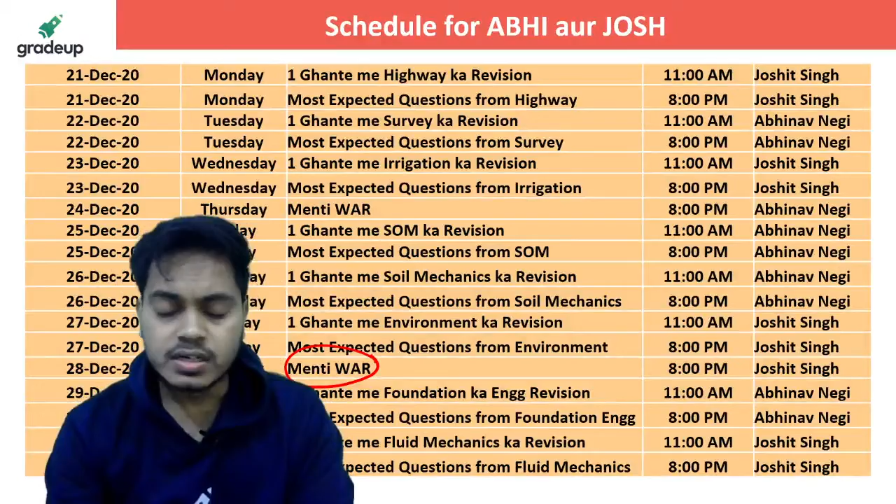If you are not aware of this Menti WAR, let me tell you that there you'll be in one team, there will be only 2 teams. One will be Abhinav sir's team and second will be my team. Commandos versus ninjas will be there.

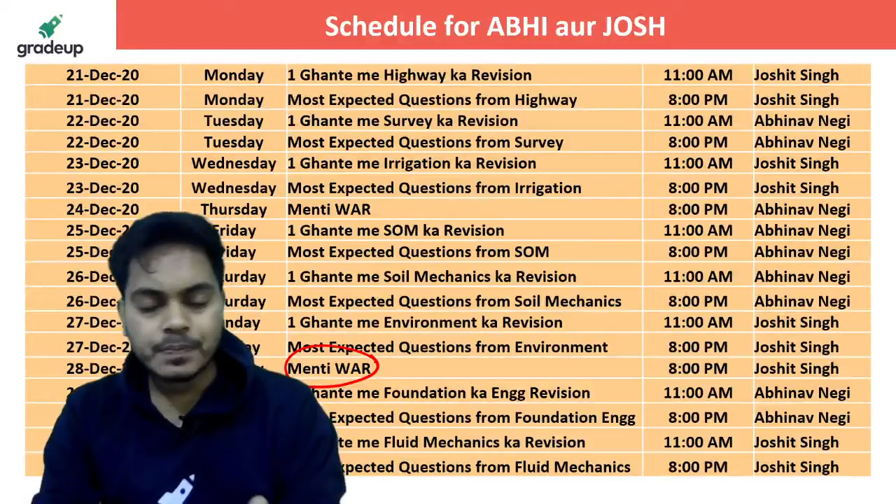So basically there you have to solve the questions from environmental engineering, fluid mechanics, soil mechanics and hydrology. These 4 subjects you have to prepare, and the questions will be from these 4 subjects only in this Menti WAR.

Hi, good evening Simran, hi Varsha and Kaushik, good afternoon guys. I hope you all are doing very well.

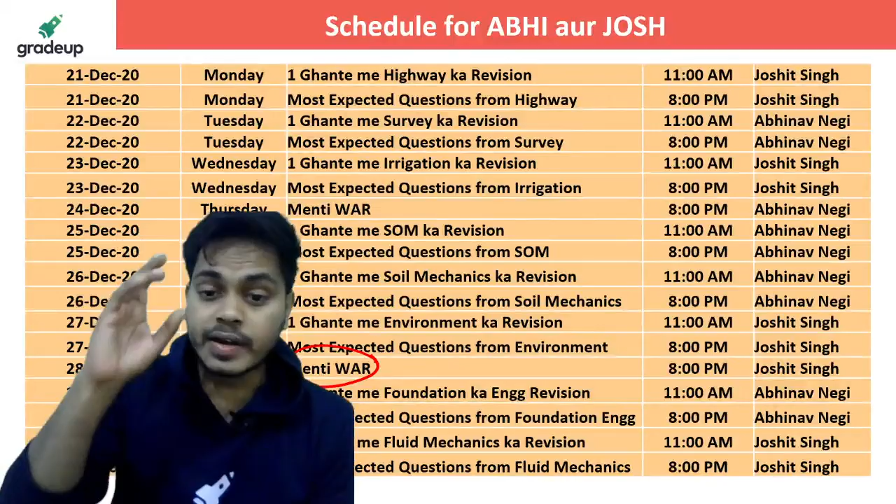So today 8 PM we have Menti WAR on Gradeup Civil Champion YouTube channel, you can join. Then after that, today we have this last session. The SOM is done for your mock gate test. Soil is done, FM is done, highway is done, hydrology is done, surveying is done, environmental is done, and now irrigation will be completed today.

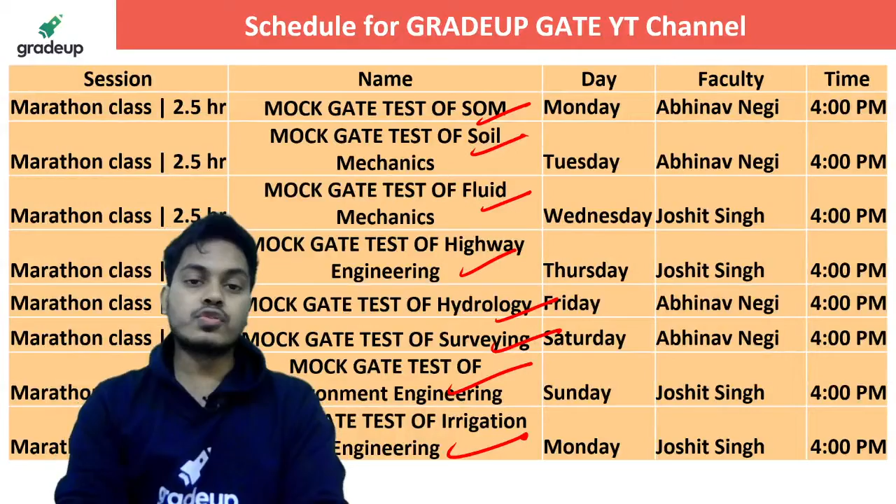Menti WAR syllabus: you are supposed to revise environment, fluid mechanics, soil and hydrology. These 4 subjects will be there in today's quiz, in your Menti WAR. It is requested to each one of you to join the quiz at the right time, because otherwise you won't be able to solve all the questions.

Session will begin at exactly 8 PM, so join there. Hi Prateek, good evening, how are you? So let's begin the session without any further delay. Guys, I have tried to cover each and every topic, so kindly try and answer this question with full power. For each question, you will be getting 1 minute.

This one minute is just to understand the approach to solve this question. Later on, I'll tell you the solution, and then you can see if you could have gotten the answer or not.

If you are getting 75% marks in this mock test on irrigation engineering, you are in a good position. If you get 60 to 75%, you need to revise irrigation engineering one more time properly. And if you are getting less than 60%, you have to give proper attention to irrigation engineering.

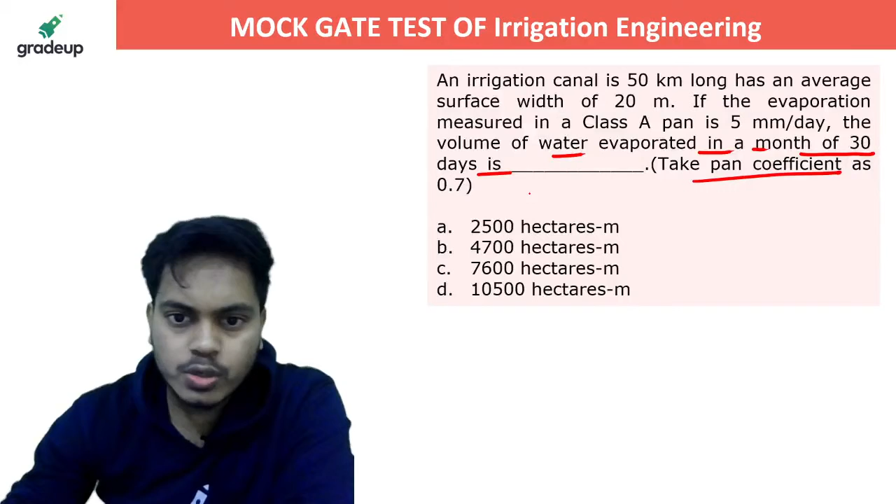An irrigation canal is 50 kilometer long, has an average surface width of 20 meter. If the evaporation measured in a class A pan is 5 mm per day, the volume of water evaporated in a month of 30 days is? Pan coefficient is given as 0.7. Not at all a tough question, so please try and answer.

Hi Bhaskar, good evening, how are you? Okay, good. Rishabh, Varsha, Aman, Shooter Vlogs and Madhvi.

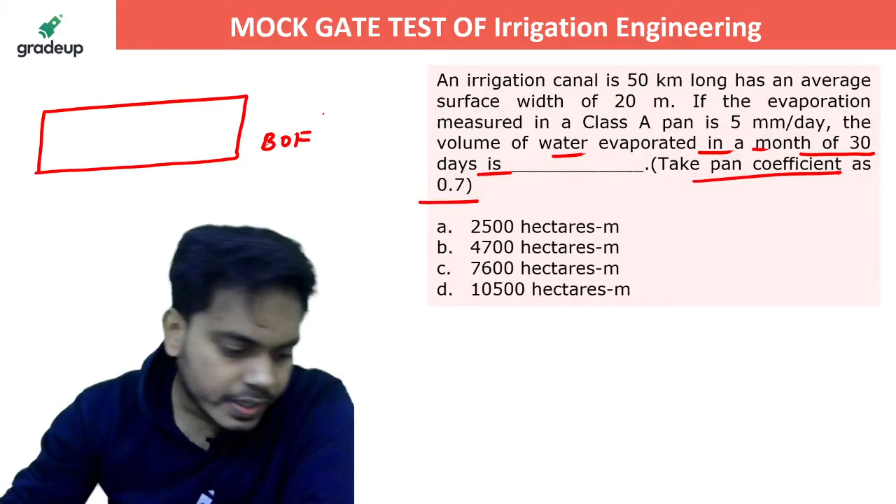So today's first name is Varsha. Right, because the answer is D. How D? You can see from here.

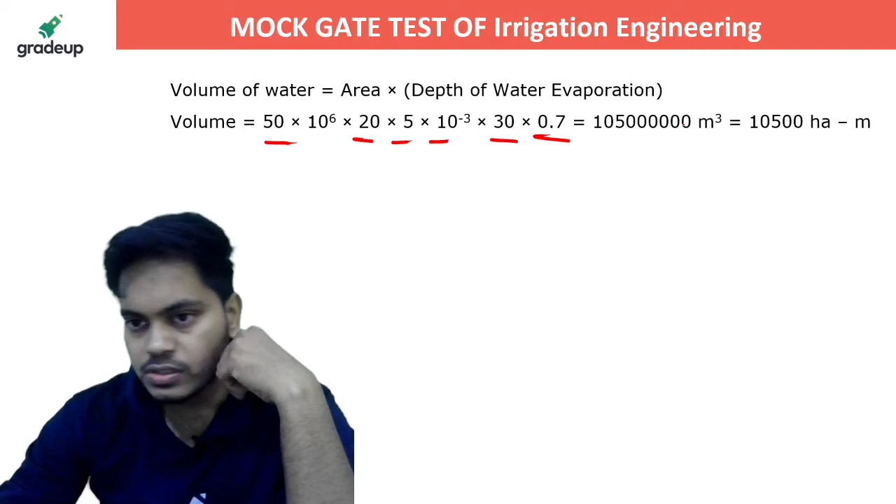So guys, basically you have to get the volume, right? How much depth is evaporated into whatever area we are having. You can clearly see here we have 50 kilometer length and the width is 20 meter. Other than that, 5 mm per day is given to us. Per day means how many days do we have? We have exactly 30 days. And what is the pan coefficient? Just 0.7. So the answer should be 10500 hectare meter. So D is the correct answer.

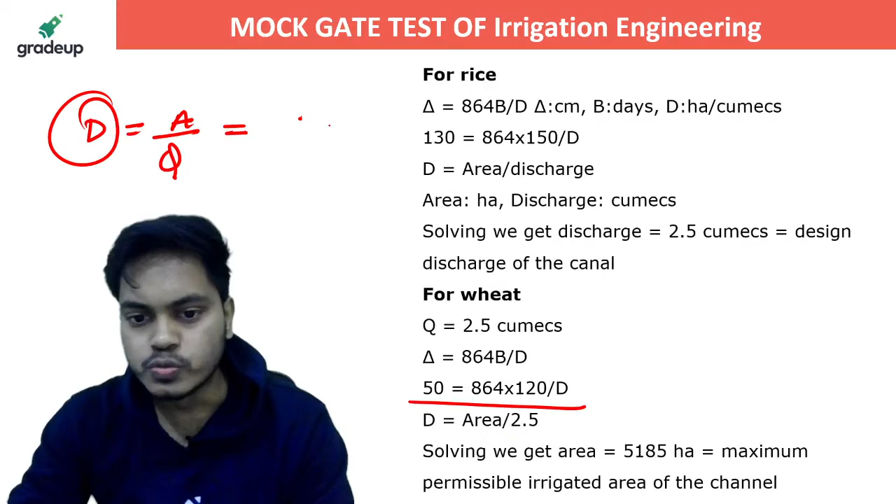So area is how much, you can see. Area I have to find out. Duty I have got from this equation, and the discharge is 2.5. From here the area should be 5185 hectare, and that is option B.

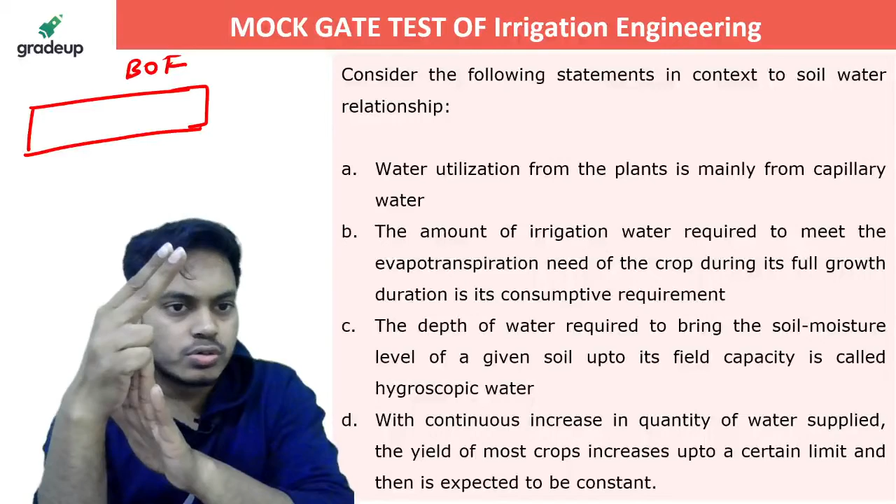Available water is also known as capillary water. Non-available water is also known as hygroscopic water. It is bonded with the soil particle with the help of molecular bonds, and available water is bonded with the help of loose chemical bonds. So hygroscopic water is not at all available, so we'll just leave it. Now available water is also of two categories: readily available and non-readily available water.

So now, water utilization from the plants is mainly from the capillary water. It is correct. Why are you saying it is wrong? It is definitely correct, right? It is definitely correct.

Next, the amount of irrigation water required to meet the evapotranspiration need of the crop during its full growth duration is its consumptive requirement, that is also correct, right? Why is it false? The depth of water required to bring the soil moisture level of the given soil up to field capacity is called hygroscopic water. But hygroscopic water, I have just told you, is the water which is not available for the growth of the crops.

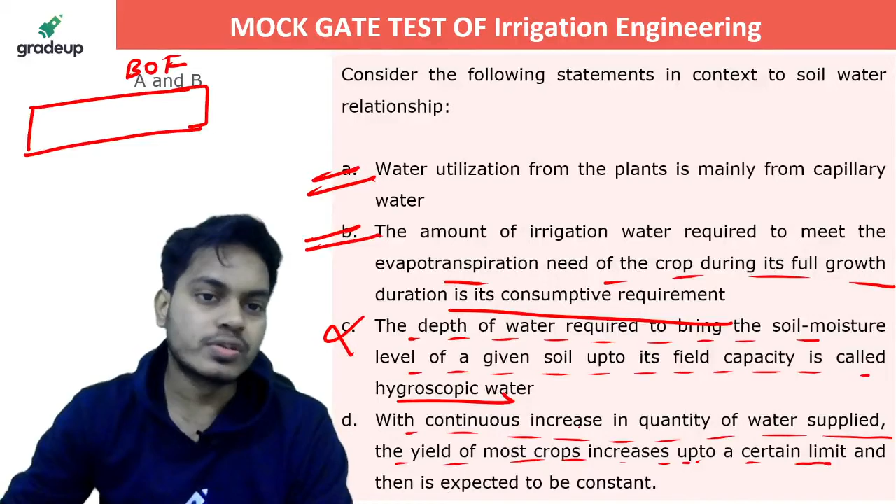With continuous increase in the quantity of water supplied, the yield of most crops increases. That's true, up to a certain limit. And then it is expected to be constant? No, it is not, the yield will decrease. So only A and B are correct.

Who gave the correct answer? Let me see. Nobody? Okay, Bhavya Sagar, Sagar gave the correct answer. Very good, Sagar. Everybody else was saying A, B, C, B, D, D, A, B, D, B, A, B, C, even D someone said, but not A, B. What is this, that's not how it works. Correct, anybody have doubt in this? I hope there is no doubt.

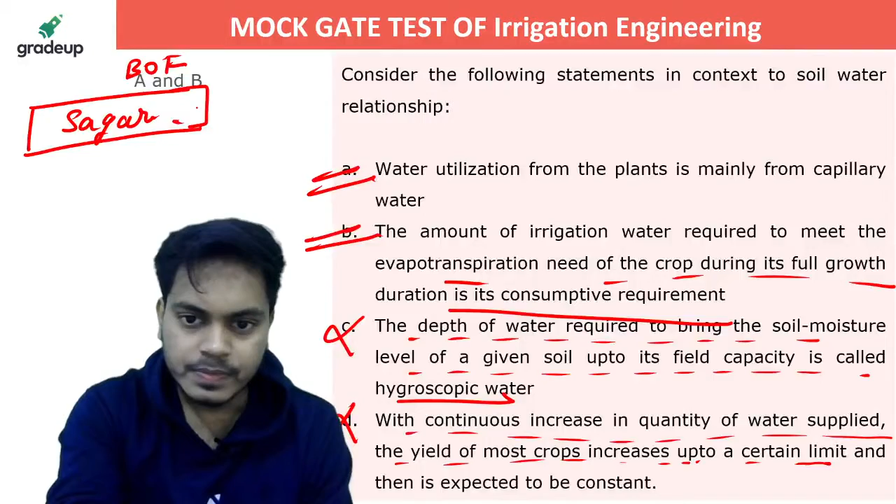Okay, let's move to the next question. An agricultural land, again it is an MSQ question. An agricultural land of 2 hectares is irrigated at the rate of 100 liter per second from an irrigation tank. The duration of irrigation is 6 hours.

It was found that actual delivery at the field is 80 liter per second, which is 2 kilometers from the tank. The runoff loss in the field was estimated as 400 meter cube. Please tell me application efficiency, conveyance efficiency, and everything else.

Come on, full power, please reply. Let's see who will give me the first answer. What actually is application efficiency, guys? You can understand, whatever water we are applying in the field, out of that some water is going into runoff, right, it is not at all used by the crops. So give me the answer to this question. You have to find the application efficiency and then the water conveyance efficiency, only these two things. Please get me the answer and let's see who gets it correct. Full power, guys, full power, please, no laziness here.

Please, no laziness here. Yep, correct, that's correct Madhavi, correct answer is A and C. Let's see how.

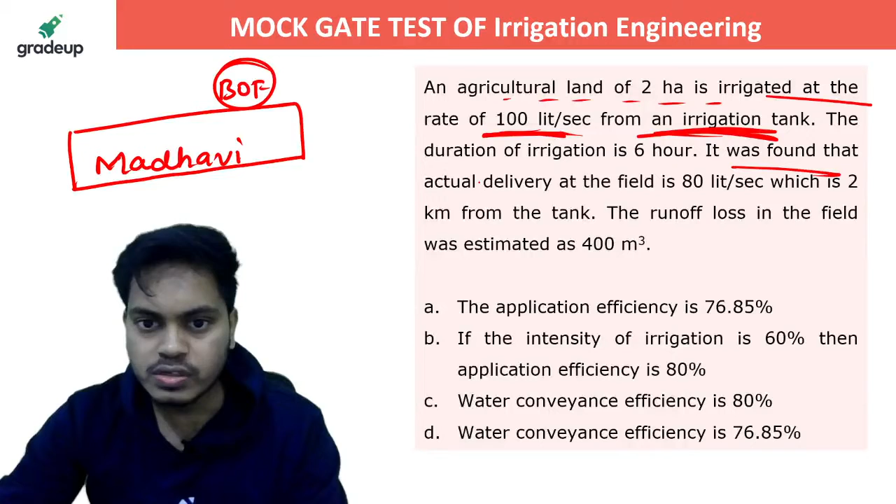So basically here you can see water conveyance efficiency, how much water is delivered in the field divided by water supplied into the canal, right? So you can see from here that agricultural land of 2 hectares is irrigated at the rate of 100 liter per second from the irrigation tank. From tank, 100 liter is going, right? It was found that actual delivery is 80 liter, so it was supposed to reach this much but only this much was reaching. So 80% is the conveyance efficiency.

Now let's see how much was entering inside the field, first in meter cube. So 80 liter per second was the supply and it was supplied for 6 hours. So for 1 second, 80 liter was entering, for 6 hours you get this much supply, that is 17,28,000 liter, basically 1,728 meter cube. Now out of this, this is what you have applied. Out of this, 400 meter cube is running off, so you have to subtract it, only this much is going inside the soil, right?

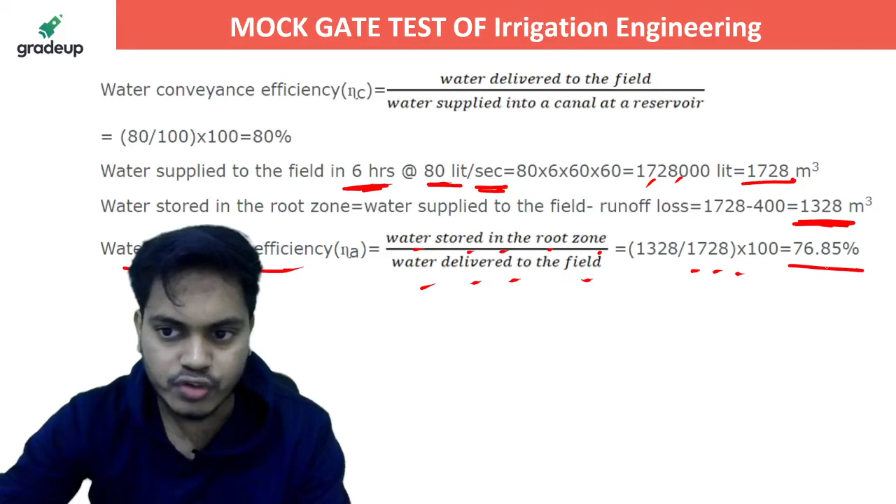So water application efficiency will be water stored in the root zone, that is 1328, divided by water delivered to the field, that is 1728, and from here you get the water application efficiency. So A and C are the correct answer. Anybody have doubt? Perfect, next question.

The culturable, again MSQ question. The culturable command area for a distributary is 2 into 10 to the power 8 meter square. The intensity of irrigation of a crop is 40%, if kor water depth and kor period of the crop are 14 centimeter and 4 weeks respectively.

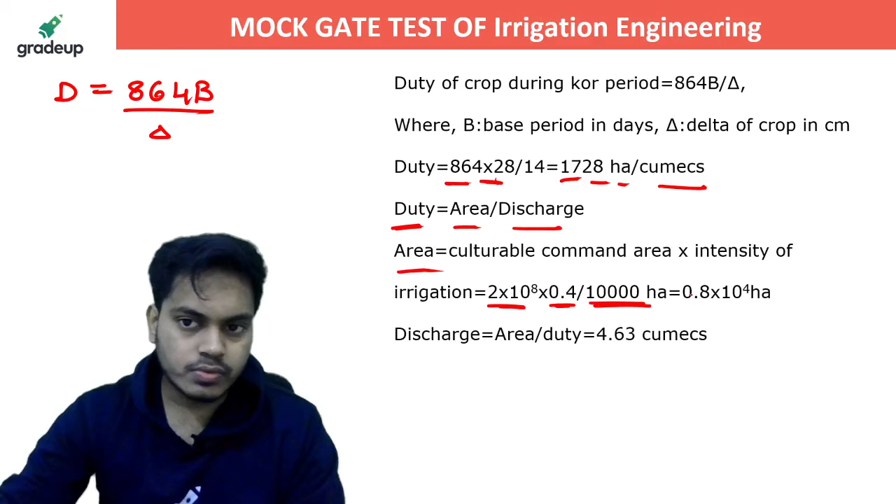So intensity of irrigation was 40%. So 40% of 2 into 10 to the power 8 is being irrigated, that is culturable command area. Divide by 10,000 to get hectare, and from here you get the value of the area.

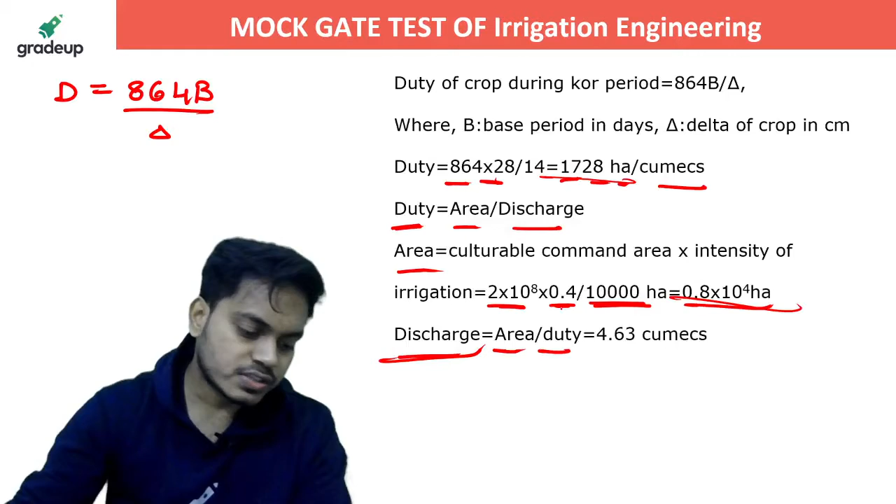Now you have the area, and you know discharge equals area by duty. You have the duty, you have the area, you can get the discharge. Everybody, that's 4.63, and the answer is discharge is 4.63 and duty is 1728. So B and C are the correct answer.

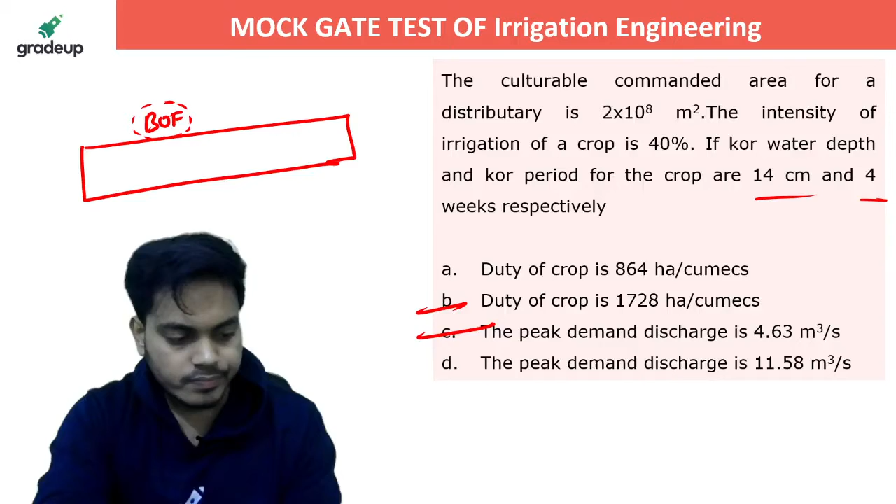Next question, again MSQ. A certain crop is grown in an area of 3000 hectare which is fed by a canal system. The data pertaining to this irrigation are as follows. Field capacity is given to us as 26%.

Optimum moisture content is 12%. Permanent wilting point is 10%. Effective depth of root zone is 80 centimeter. Apparent relative density of soil is 1.4. If the frequency of irrigation is 10 days and the overall irrigation efficiency is 22%, then which of the following statements is or are correct?

Daily consumptive use is 1.746 centimeter. Discharge required for irrigation is 21.38 meter cube per second, or what? Answer please.

Prayag, what happened? Your answer is deleted. Why? Did you remove it? Answer please, everybody, try.

Please try this question and get me the answer. Daily consumptive use and the discharge you have to find in this question. Can we do that?

Very good, let's see if you are getting the correct answer. Yes, that's correct, Chandralekha. C and D are the correct answer. Let's see how.

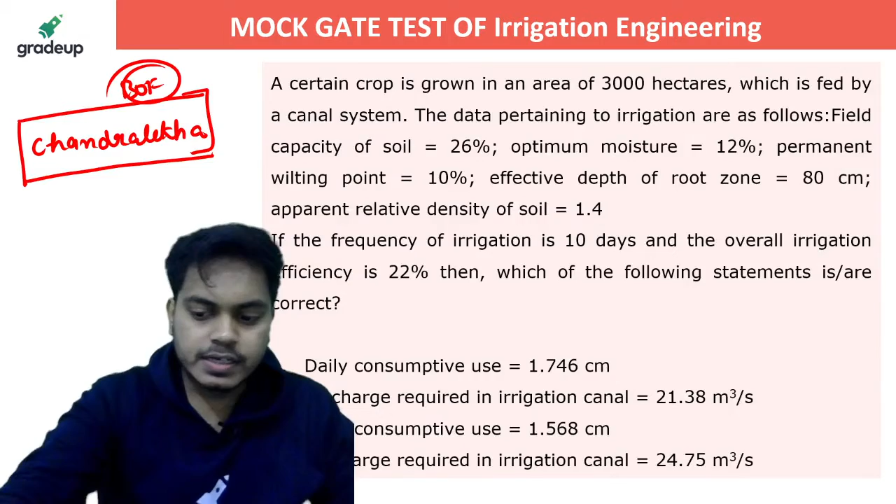I have discussed this concept in my lectures also. If you don't know this concept, you can watch any session of mine, it is available on YouTube also. There I have told you about field capacity and optimum moisture content, and how to get the depth of the water. From here you will be getting the depth of water as 15.68 centimeter.

Daily consumptive use will be how much? If this is the requirement and we have 10 days, then daily will be 1.568. Since I have written daily consumptive use, I don't have to write per day, because it is already said daily consumptive. Total irrigation water required, that is loss in field and conveyance losses.

So here, guys, it was given that we have 22% overall efficiency. If this much water I supply, most of it will be wasted, so I have to take care of this. I am increasing my requirement to 7.127, keeping 22% efficiency in mind.

So now if I provide 7.127, out of that 1.568 will be provided to my crop, which is required. Field area is 3000 hectare, which is 3000 into 10 to the power 4 meter square. So discharge required will be how much, guys?

Discharge you can get with the help of this, since 7.127 is required per day, and area is 3000. So from there, converting days into seconds, you will get it as 24.75 meter cube per second. Set hai?

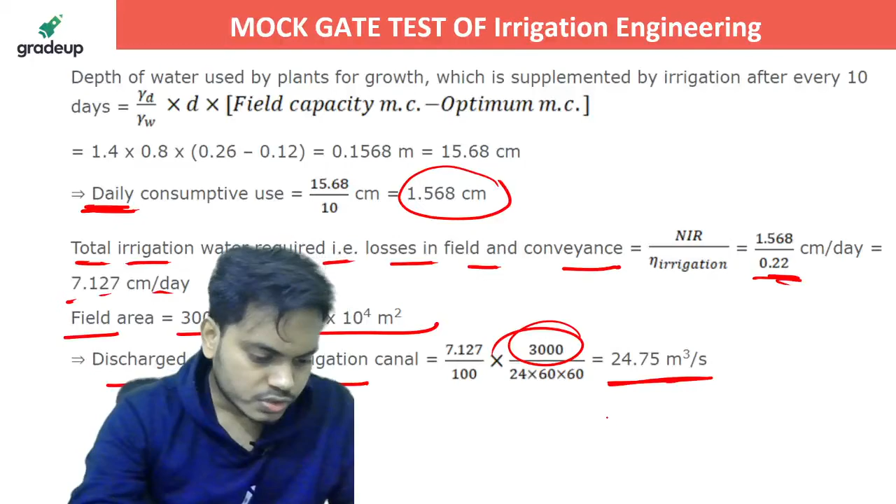Very good. Your revisions and most specific question was recently studied, so you were able to answer. That's good. That's great. That's great.

Next question. The moisture holding capacity of the soil in an 80 hectare farm is 16 centimeter per meter. The field is to be irrigated when 50% of available moisture in the root zone is depleted. The irrigation water is to be supplied by a pump working for 8 hours a day, and water application efficiency is 80%. If the root zone depth of crop is 1 meter and the consumptive use is 4 mm per day, then capacity of irrigation system required to irrigate the crop in 40 hectare is how much? Solve this now.

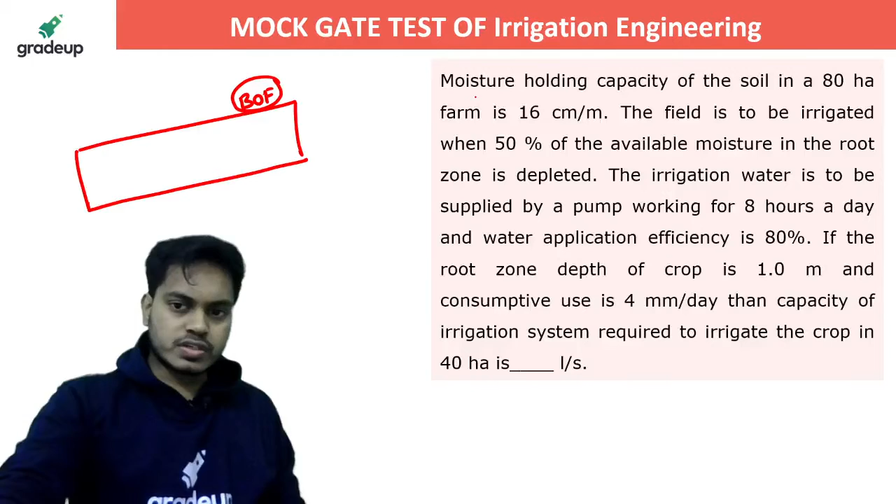Okay, so irrigation is done when available moisture reaches 50% of the available one, which means 8 centimeter, it means 80 mm basically. So frequency of irrigation will be 80 by the consumptive use. It was given to us as 4 mm per day, so 80 mm by 4 mm per day gives us the frequency of irrigation as 20 days.

Okay, now next is water delivered to the farm. So you can clearly see here 80% is the efficiency, so how much do I have to apply? I have to apply 10 centimeter. Instead of 8 centimeter, I will apply 10 centimeter, so that 2 centimeter will be in the loss, and rest amount will be provided.

Then what is the total volume of applied water, guys? It will be 10 into 10 to the power minus 2, just to convert it into meter, and 40 into 10 to the power 4, because that was the area, 40 hectare. So total volume of the applied water is 40,000 meter cube. Now the discharge capacity will be volume applied by frequency of irrigation. That is the discharge capacity basically, meter cube per second.

From here you will be getting 23.1 liters per second. We know that for 8 hours per day it is running. So discharge capacity will be how much? 23.1 for 8 hours per day, and from there you will get your answer as 69.3. A new type of question, I suppose.

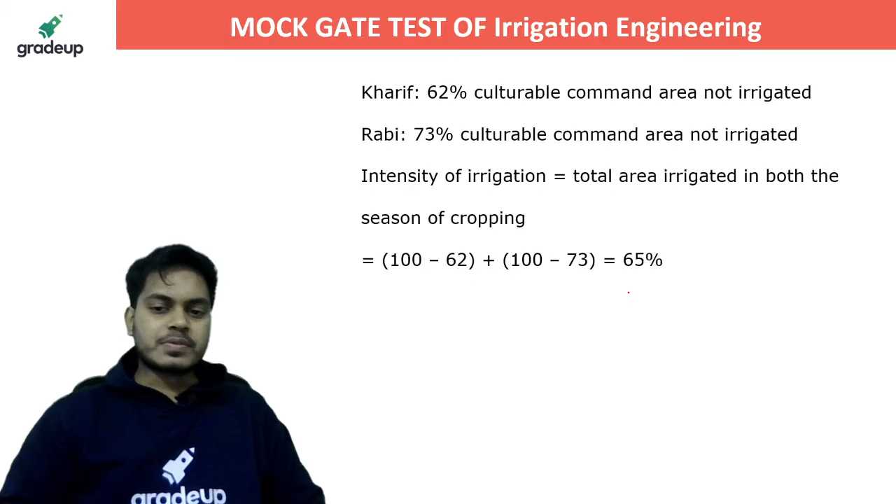Kharif season is 62% culturable command area not irrigated, Rabi is 73% not irrigated. So what is the intensity of irrigation, the total area irrigated in both seasons of the cropping? So 100 minus 62, it was irrigated, and 100 minus 73, it was irrigated. So total it was 65% of the area irrigated. So 65% is the correct answer.

Very good, Amit. Next question. An identified source of irrigation water has ion concentration of sodium, calcium and magnesium as 22, 12 and 7 milliequivalent per liter respectively. The SAR, sodium adsorption ratio, of this water is how much? Answer quickly, very easy and cheesy question.

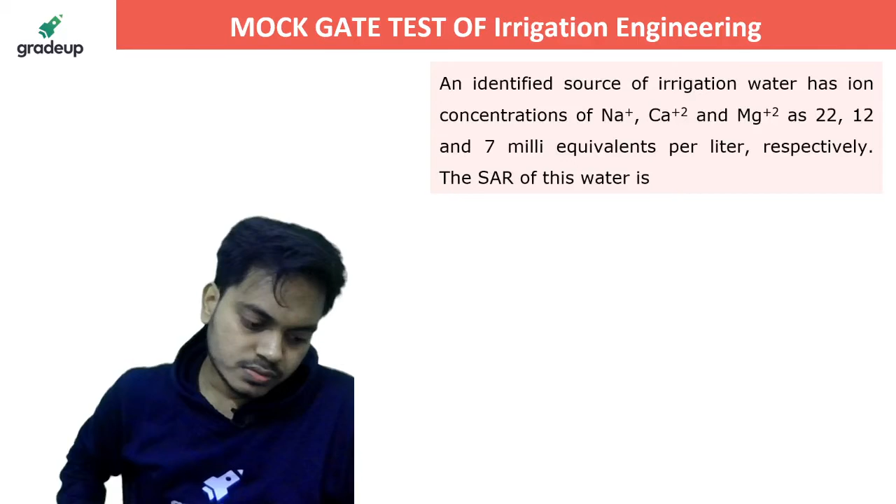How much? 7.13. Okay, 7.14. Cool, let's see, yep 7.14 is the correct answer. Sodium adsorption ratio is nothing but the sodium ions under root by calcium plus magnesium by 2. Sodium was 22, calcium was 12 and magnesium was 7, so it will be 22 divided by under root of 12 plus 7 by 2, that's 7.14.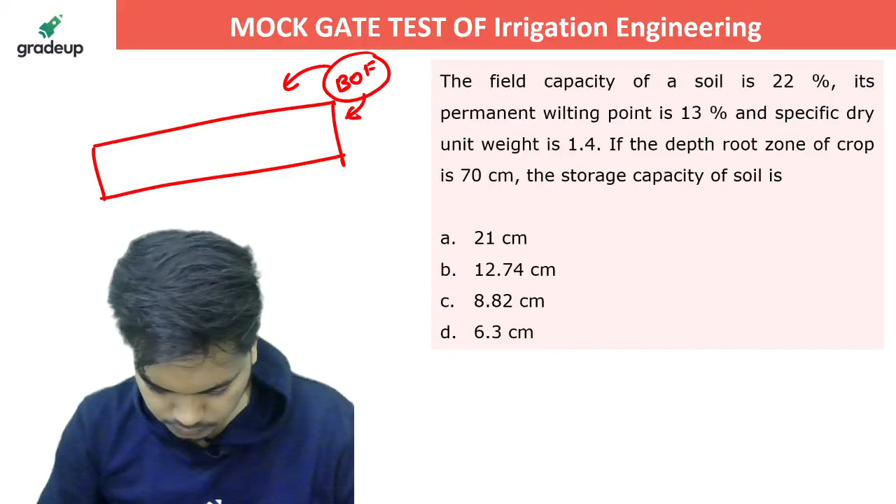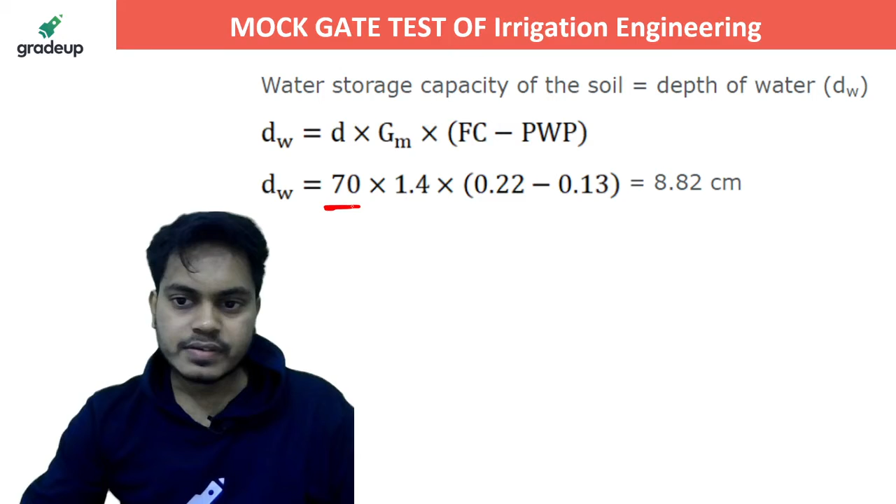C, perfect, so yes it is C. Water storage capacity: depth of water is D into GM into field capacity minus permanent wilting point, that's 1.4, given as 70 and this. So 8.82 is the right answer. It was an easy question though.

The depth of penetration of water along the length of the 45 meter border strip are observed. The observed values are 2, 1.85, 1.93, 1.55, 1.45 and 1.2. What is the water distribution efficiency? Answer please.

This is the ground surface, and the water is distributed something like this.

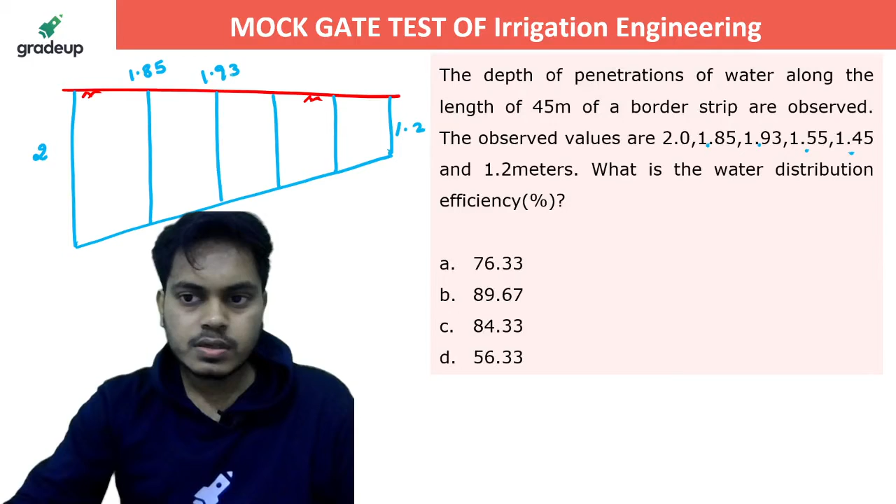So how much is it? 2, and this is 1.2. 1, 2, 3, 4 lines I'll be needing here. So 1, 2, 3, 4. It is 1.85, it is 1.93, it is 1.55, it is 1.45 meter. Get me the answer now. This is how the water is distributed. So now for the answer, first get the average value of all this.

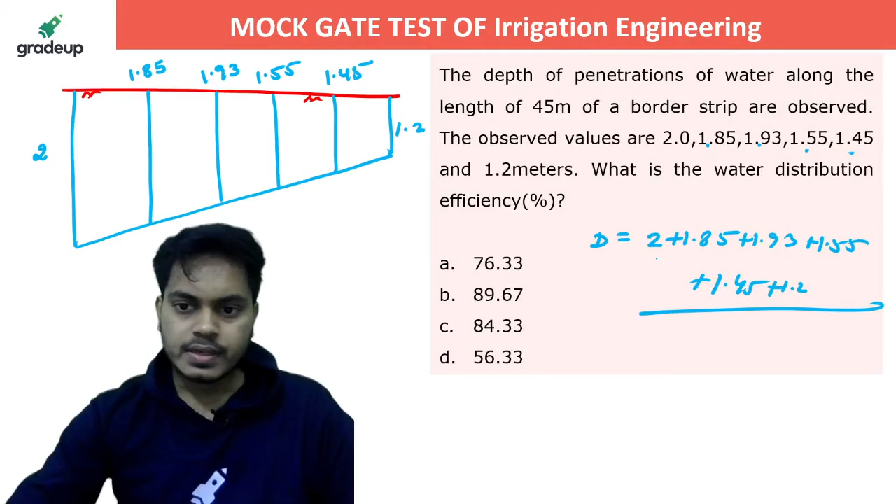The average will be how much? It will be 2 plus 1.85 plus 1.93 plus 1.55 plus 1.45 plus 1.2, divided by 6. So let's see, it is how much? 0.26... 0.34, 0.927 right? Okay, here it is: D values 2, 1.85, 1.93, 1.55, 1.45, 1.2 divided by 6. It is 1.66 meter. Correct.

Now the magnitude of deviation: you have to see how much we are deviating from the average value. Average value is 1.66. So you have to see how these depths are deviating from the average value, and take the average of all these. You can see, 2 minus 1.66, that much, and the average of all these is 0.26. So 1 minus d-bar by D into 100 will give you the distribution efficiency.

It is how much? 1 minus 0.26 by 1.66, and it is 84.33%, which is option C.

Next question. A canal has a flow rate of 4.5 cubic meters per second and has medium silt size with an average grain size of 0.016 centimeter. What will be the velocity through the canal as per Lacey's theory? Please answer.

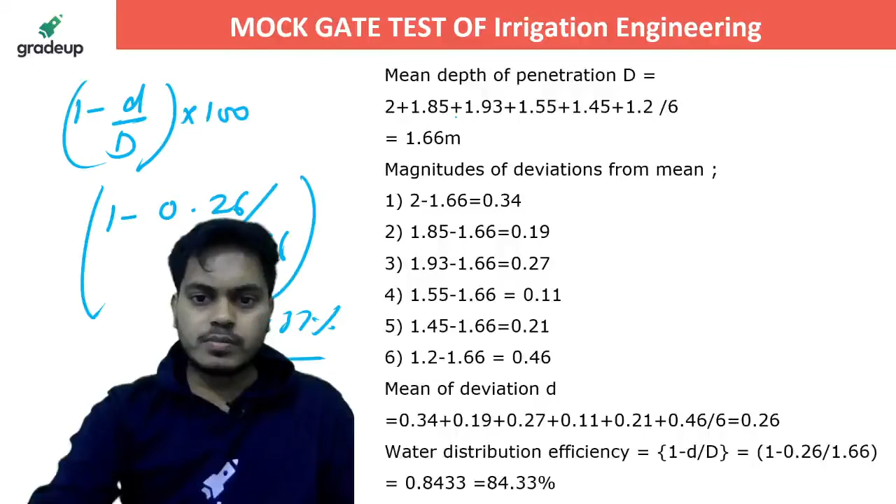C, B, let's see. So silt factor is how much? It is 1.76 into root D. D is the average diameter of the silt particle, and that too in mm, right? It is given as 0.016 centimeter. So it will be 1.76 under root of 0.16... 0.704 it is coming.

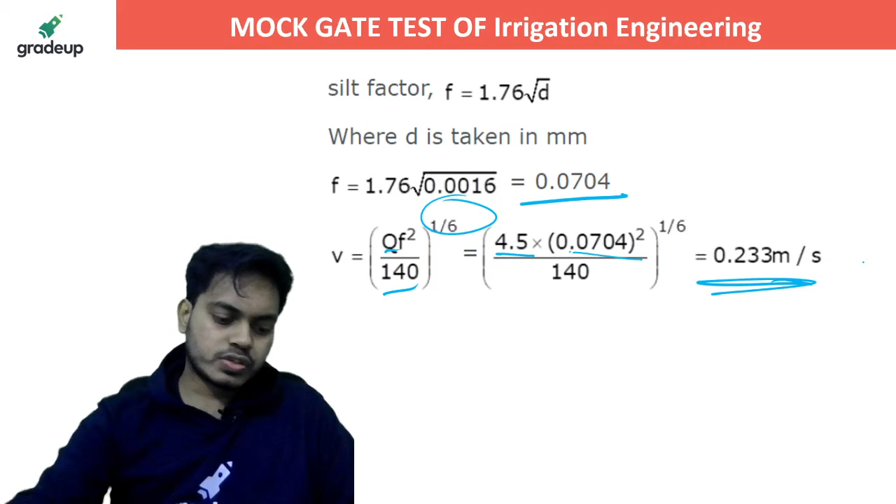Wait, I think this must be wrong. I have to put the value of D in mm only, please remember this one thing. No problem, I'll just change it here. 0.0016 mm, now it is fine. Now you will be getting F value as 0.0704 because this D we have to put in mm only. Discharge is 4.5, F is 0.0704, squared, by 140 raised to the power 1 by 6, and from here the answer is 0.233, which is option C. Correct?

Very good, next. The slope of a regime channel designed using Lacey's theory: if the average size of bed material is 0.8 mm, the velocity of flow is 0.944 meter per second, then which of the following statements are correct? Again this is an MSQ question, please solve everybody.

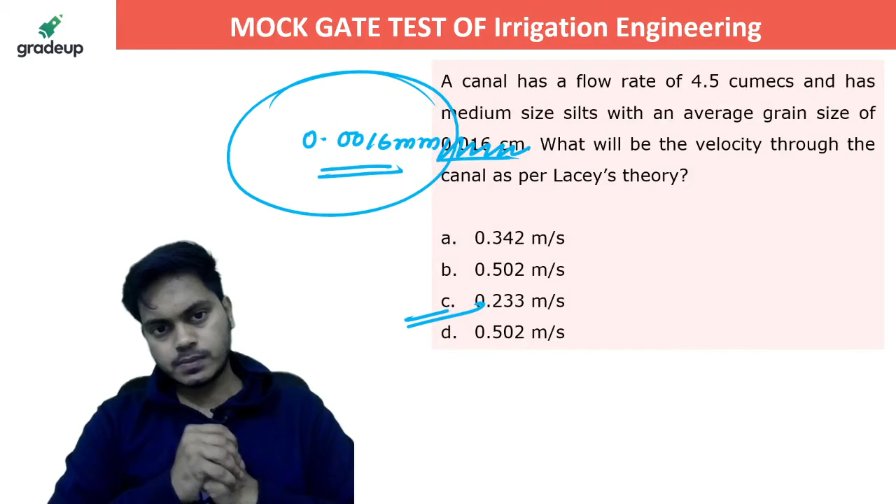Answer guys: the slope of a regime channel is designed using Lacey's theory. If the average size of the bed material is 0.8 mm and the velocity of flow is 0.944 meter per second, you have to tell what is the silt factor, discharge through the channel, bed slope, and wetted perimeter. Let's see if you can get the correct answer.

Everybody, let's see if we can get the correct answer. Rishabh is saying A and B. Is it A and B only? Let's see if Rishabh is correct or not. He is saying A and B.

Sonu ji is saying A, B, D. Madhvi is saying A, B, D. So Rishabh, would you like to change your answer, or are you confident enough that the answer is A and B only? Jayesh is also saying A, B, D. Atul is also saying A, B, D. Abhay is also saying A, B, D. Answer is A, B, D only.

A, B, D. Right, let's see how. Silt factor I have just told you how much it is, it is 0.8 and 1.574. Velocity of the flow you can get the same, just now we have done it, right? And if you want you can get the discharge from here.

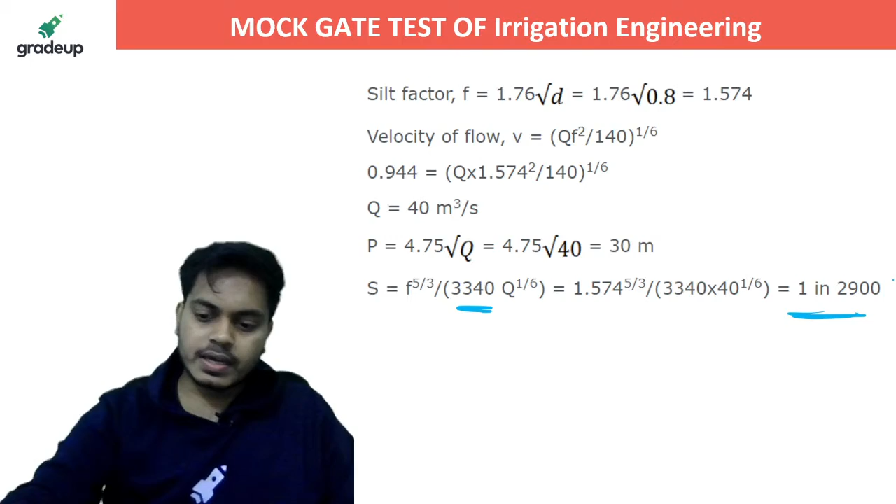Velocity I have, so the discharge is 40 meter cube per second. Parameter can be determined as per Lacey's theory, 4.75 under root q. I have the discharge as 40. From here parameter is coming this much, and this is the last equation of slope, I have told you this, I think. So it is F raised to the power 5 by 3 into 3340, divided by 3340, q to the power 1 by 6. So from here the answer is 1 by 2900. Instead of 2400, 2900 should be the slope. 1 in 2900, very good, Amit.

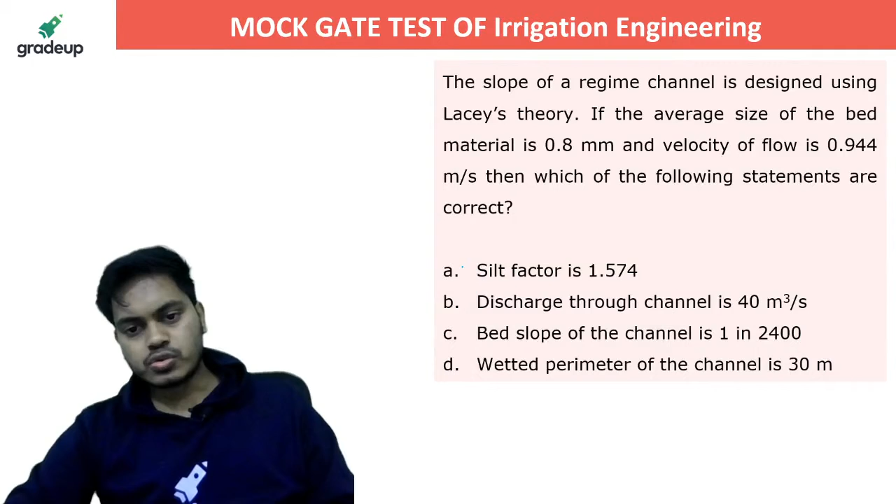Very good, so A, B and D are correct. Next question: select the correct statement regarding theory of seepage. Regarding theory of seepage, please get me the answer. According to Bligh, percolating water flow follows the outline of the base of the foundation. According to Lane's creep theory, horizontal creep is less effective in reducing the uplift or causing loss of head than vertical. According to Lane's creep theory, vertical creep is equally effective in reducing the uplift or causing the loss of head as that of horizontal creep.

Answer everybody, let's see if we can get the correct answer to this question also. No, obviously, right? MSQ, yes this is MSQ. That was MSQ guys, this question is MSQ only.

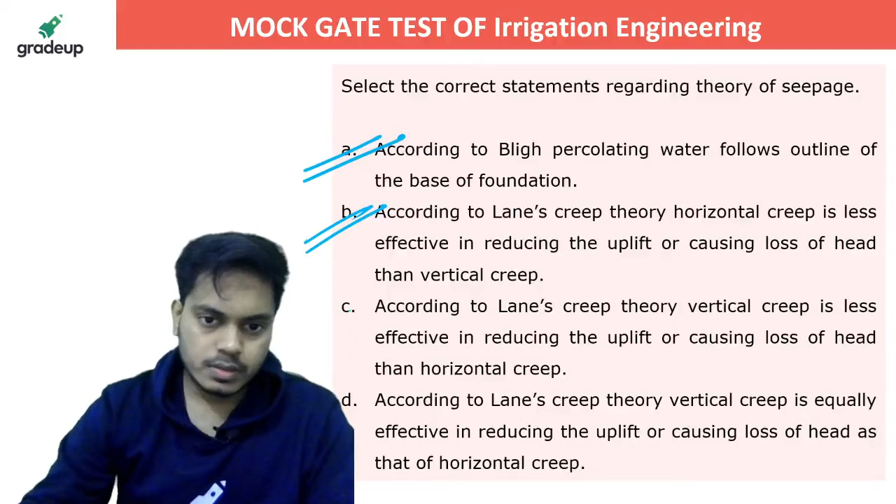Harsh mat kar yaar, please. Request karunga, whatever you want to write, just write it once. Just a request.

All correct? Okay, A, B, C, D. A, B, D. Come on guys try, let's see if you can get it. Let's see guys if you can get it.

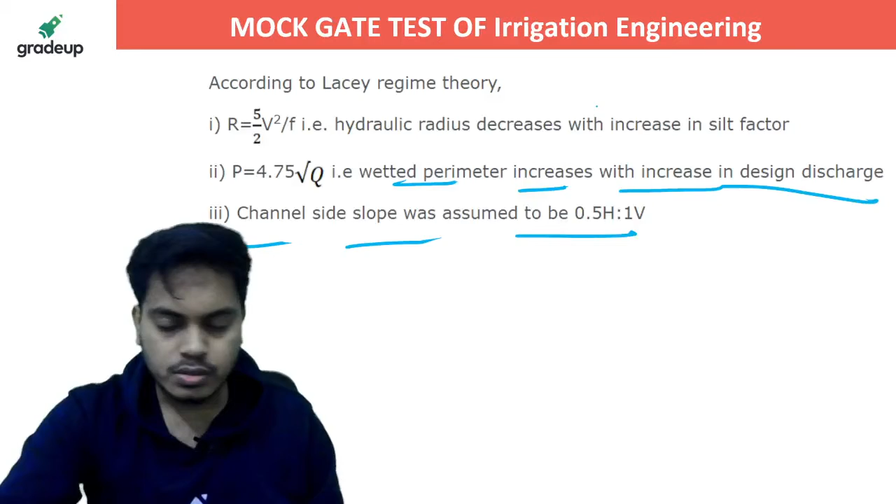Then P is equals to 4.75 root discharge. So wetted perimeter increases with increase in design discharge, that is also true. Channel side slope was assumed to be 0.5 horizontal by 1 vertical, correct? Correct, this was also being told. A regime channel will have side slope of value 0.5 horizontal by 1 vertical.

Next: calculate the safe length of sheet pile in meters provided below the bed of the river in alluvial soil using Lacey's scour depth. Given discharge per unit width, that is the small q, is 2.8 meter square per second, and the silt factor is given to us as 1.3. Kindly please get me the answer, everyone. Calculate the safe length, guys, quickly.

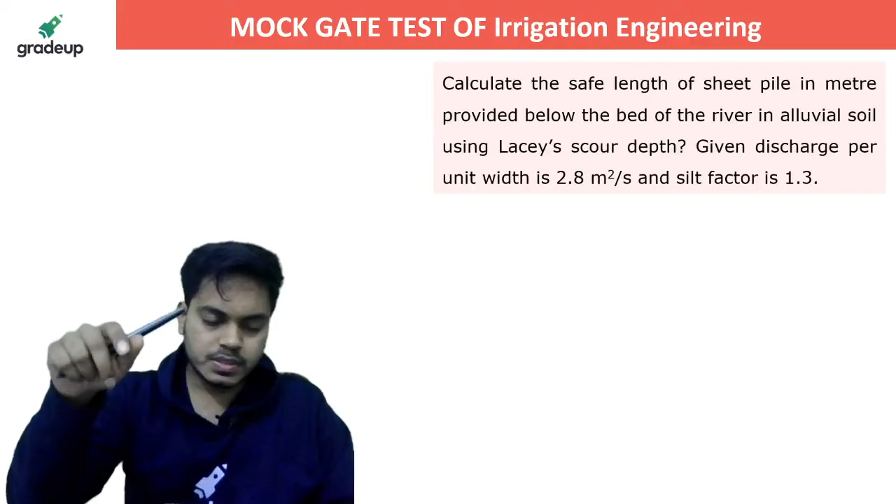Answer. Okay, Rishabh, let's see if you have got the correct answer or not. So Rishabh, this is what? This is the depth of sheet pile.

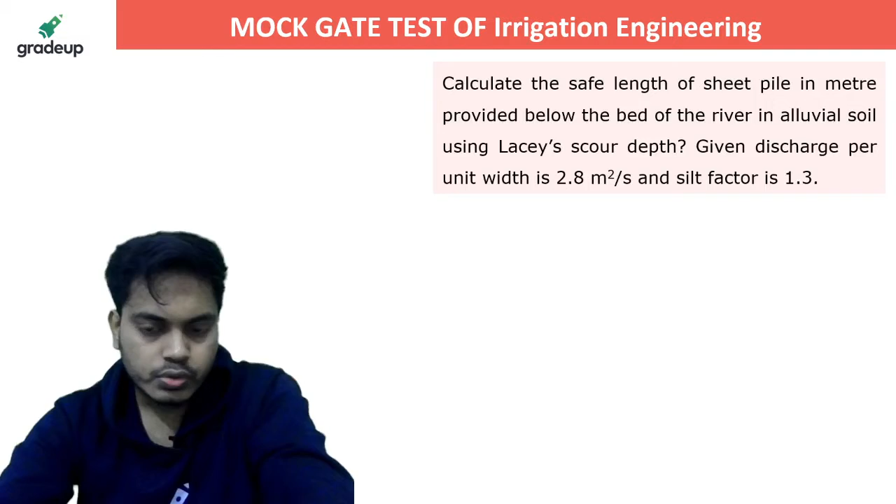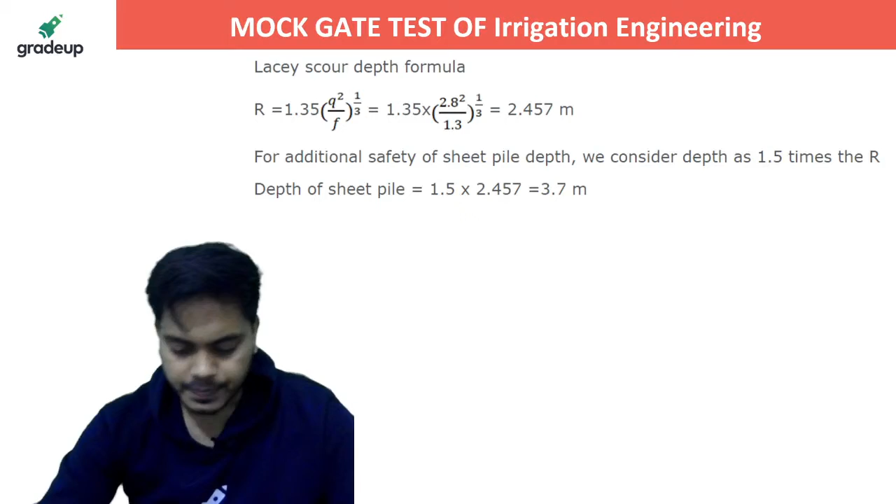Are you considering the factor of safety also, everyone? No, you are not, right? So Lacey's scour depth formula is very simple. There's the small q and the silt factor, and from there you will be getting the Lacey's scour depth. Direct empirical formula, there is nothing more to tell about this. For additional safety of sheet pile depth, we consider the depth as 1.5 times the R. So depth of sheet pile will be 1.5 times of this, that is 3.7 meter. Please don't make these mistakes.

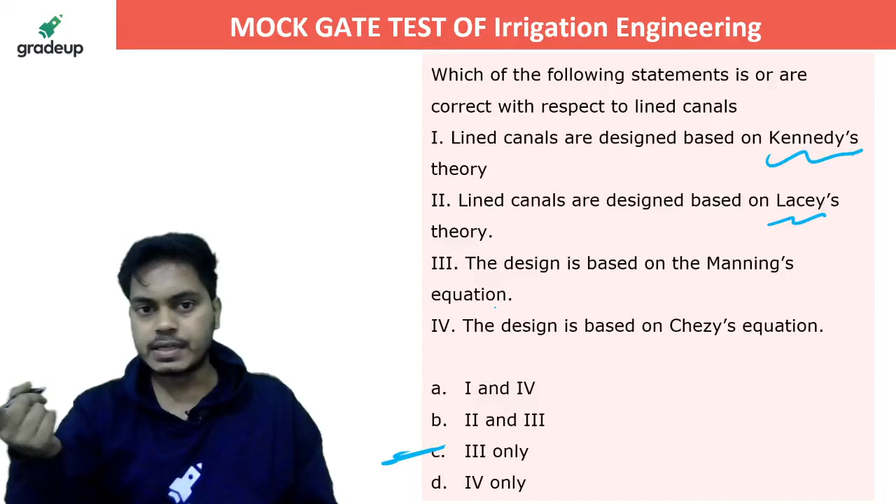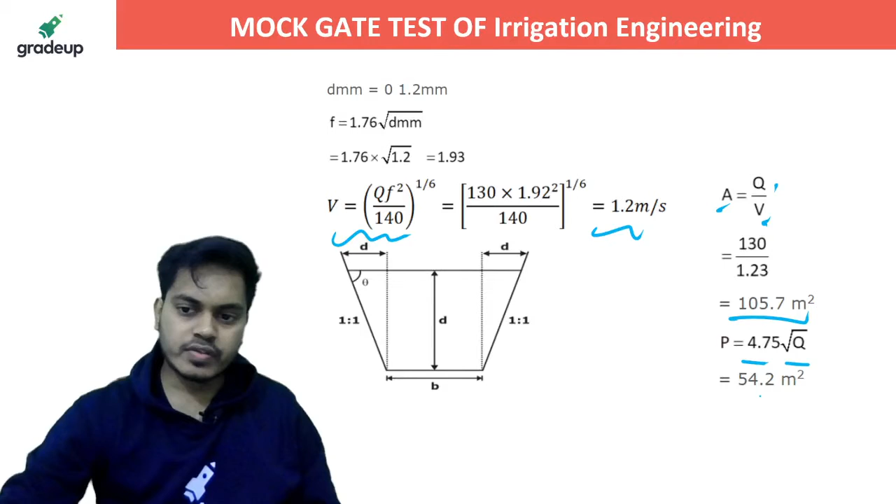Okay, I'm telling you the answer now. See, so I have the size in mm as 0.12, isn't it? 1.2, right, 1.2. Next, from here the silt factor is 1.93, right? So this is correct. Next, from the same equation which we are using again and again, velocity is 1.2 meter per second, so this is wrong. Next, area is discharge by velocity, that's 105.7, so this is correct. Then perimeter is 4.75 under root q, that's 54.2, correct, right? So A, B, D is the right answer.

Next question. The concentration of sodium, calcium and magnesium are given to us. The electrical conductivity is 200 micromhos per centimeter at 25 degrees Celsius. Now what is the SAR and what is the type of this water?

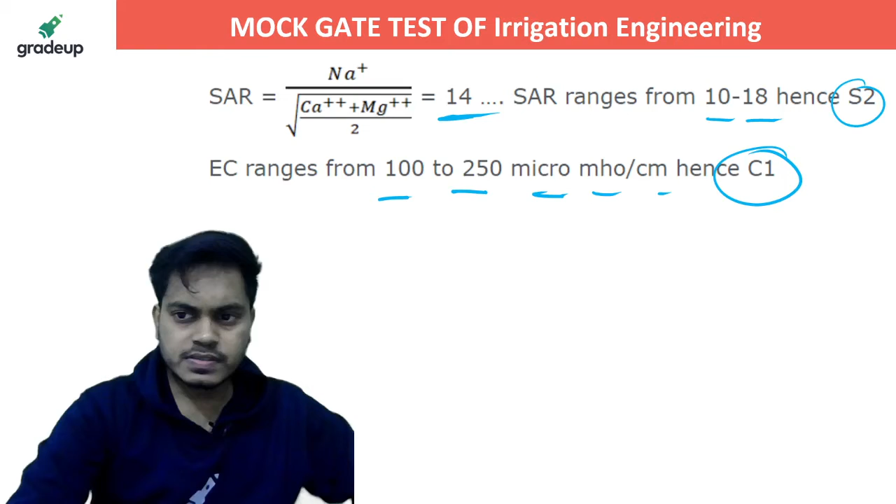All right, so SAR is coming as 14, and from 10 to 18 it is S2 category, right? And from 100 to 250 micromhos per centimeter it is C1 as per the electrical conductivity, right? So the answer should be 14 and C1 S2. 14 and C1 S2, A and C.

Next question. An area of 0.04 hectare is irrigated with the help of a tube well with discharge through supply ditch 0.02 cumec. Okay, so cumec basically, right?

If infiltration rate F is 15 centimeter per hour and the average depth is given as 17 centimeter, then what will be the time required and maximum area that can be irrigated? We have to tell how much time it will take to irrigate this land, and also what will be the maximum area that can be irrigated.

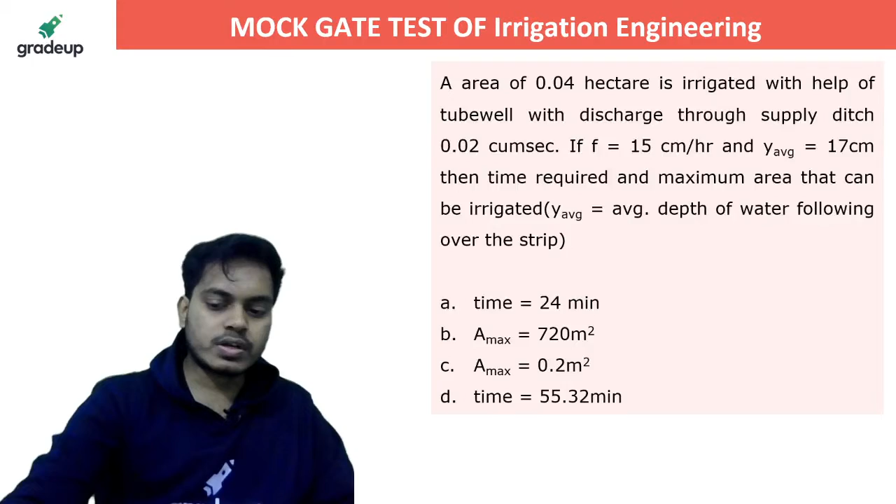You have to use this important equation: T equals 2.303 Y by F, where Y is the average depth of water in the field, F is the infiltration rate, and Q is the discharge here. You have to keep track of the units — whatever units you are putting, they should be consistent.

So how to get the area? Area will be discharge divided by the infiltration rate we have. So discharge is how much? Where is it given? 0.03 is written, wait, it should be 0.03 here — typing mistake, sorry.

0.03, okay that's a typing mistake. So from here you get discharge as 0.03 divided by the infiltration rate, 15 centimeter per hour. First we converted it into meters, then converted it into seconds. Now from here area is 720 meter square.

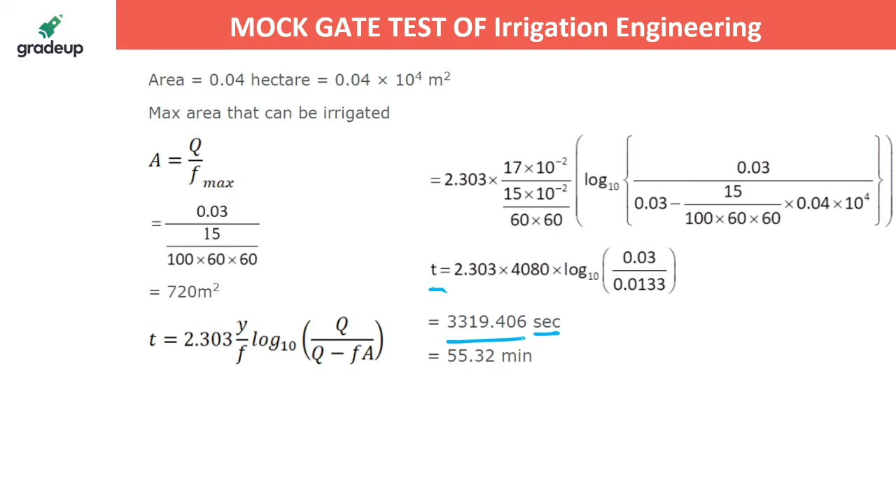That is correct. Next, put all the values into 2.303 — it was 17 centimeter, now converted to meter, and this was 15 centimeter per hour, now it is in meter per second. Convert accordingly, and the value of t comes in seconds as 3319.406 seconds, which is 55.32 minutes. So D is the correct answer.

B and D are the right answers.

Next question. Following data were obtained from the stability analysis of a concrete dam: total overturning moment about toe is 3 into 10 raised to the power 5 ton meter, total resisting moment about toe is 4 into 10 raised to the power 5 ton meter, total downward weight of the dam is 6,000 tons, total uplift force is 1,000 tons, base width of the dam is 50 meter. Calculate the maximum and minimum pressure on the soil.

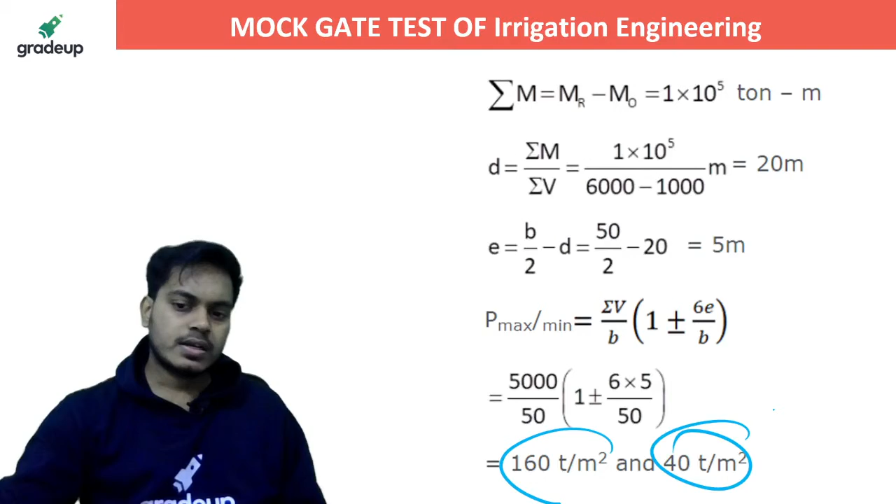P max you will find from here — it is plus minus, so the plus value will be 160 ton per meter square and the minus value will be 40 ton per meter square. So 160 and 40 ton per meter square is the answer. C is the right answer.

Next, a gravity dam has upstream water depth of 75 meter and tail water depth of 7 meter as shown in the figure. To relieve the uplift pressure, a drainage gallery has been provided in the dam. The center line of the drainage gallery is 8 meter away from the heel of the dam. What will be the uplift pressure on the center line plane of the drainage gallery in kilonewton per meter square?

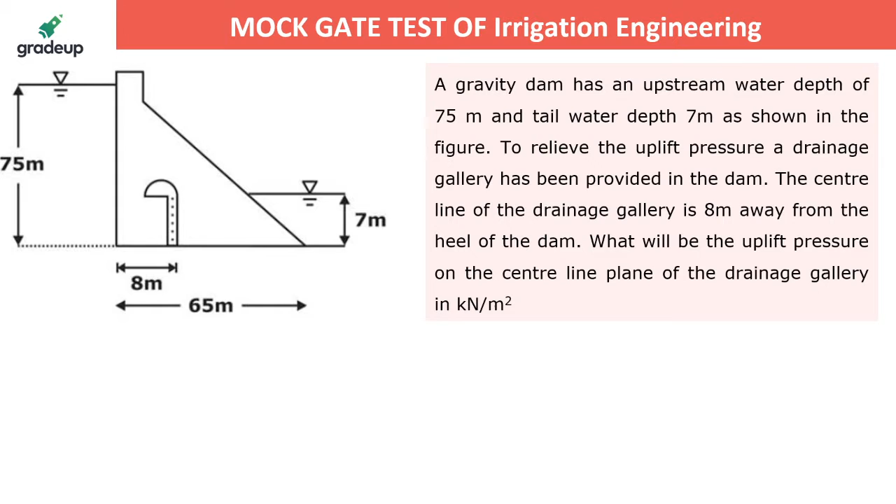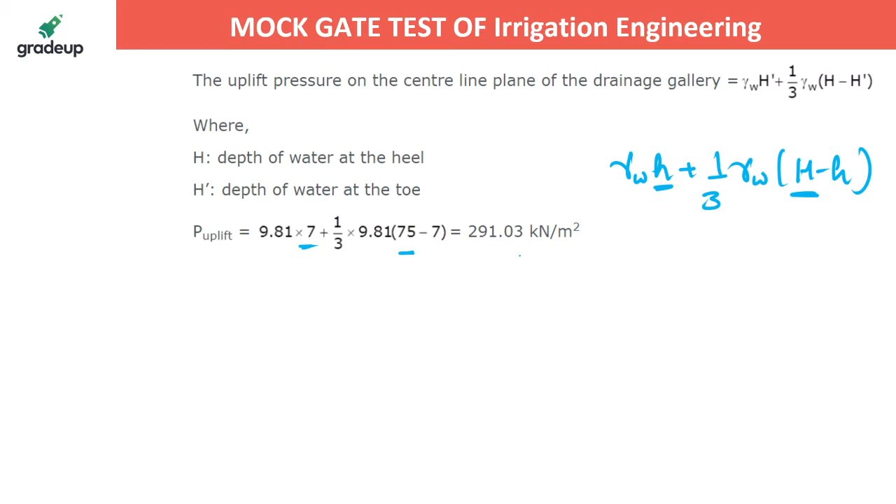291. Okay, so we have to find out this ordinate. So it is gamma W H plus 1 by 3 gamma W into capital H minus H. This is the height of water in the downstream and this is the height of water in the upstream end. In the downstream it is 7, in the upstream it is 75. From here it is 291.03 kilonewton per meter square.

Tell me this question now. For the elementary profile of gravity dam, the height of the water level from the base is 20 meter. Assuming the unit weight of water as 10 kilonewton per meter cube and the unit weight of concrete as 24 kilonewton per meter cube, assume uplift to have developed fully.

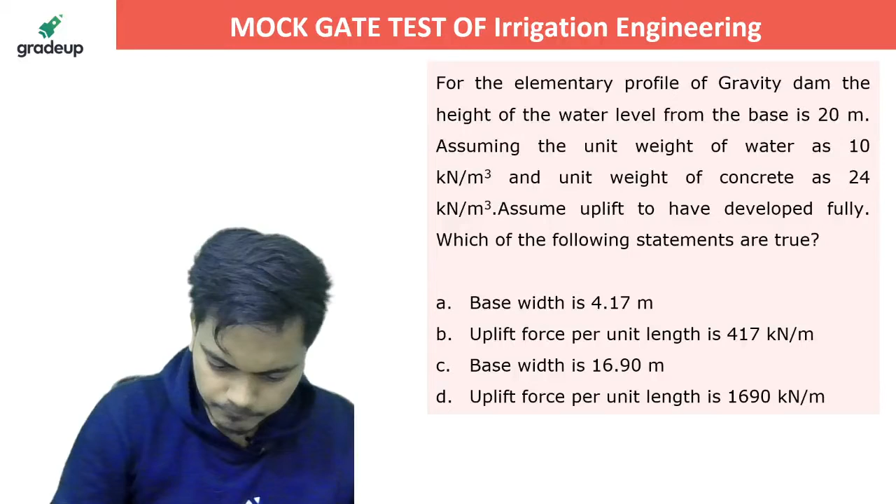Okay let's see. So guys, for no tension at the base, we know that base width will be H under root G minus C. Set hai, set hai.

Please answer. Okay, so from here you will be getting the value as how much? 16.90, right? Right.

Right, okay, and as per your uplift, for how much uplift we will be having, you can see half gamma w b h, right, and that is how much? 1690 kilonewton per meter. Next question.

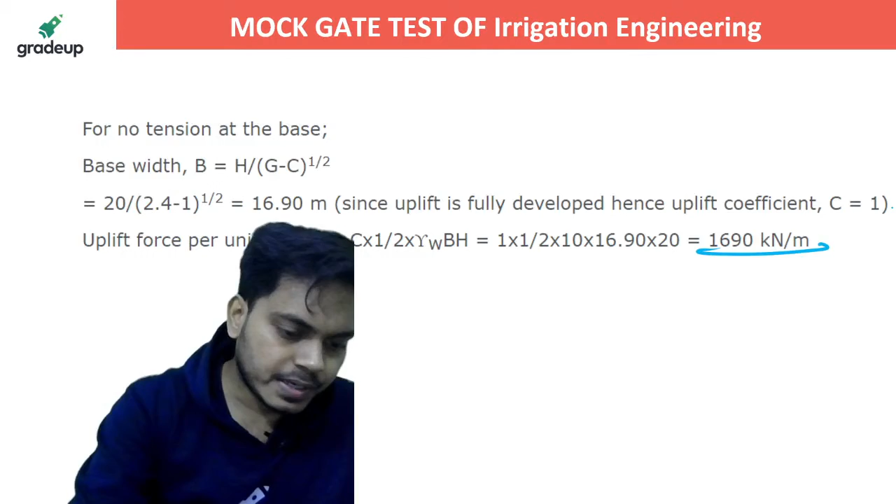Ignoring uplift. Ignoring uplift. Answer, everybody, full power.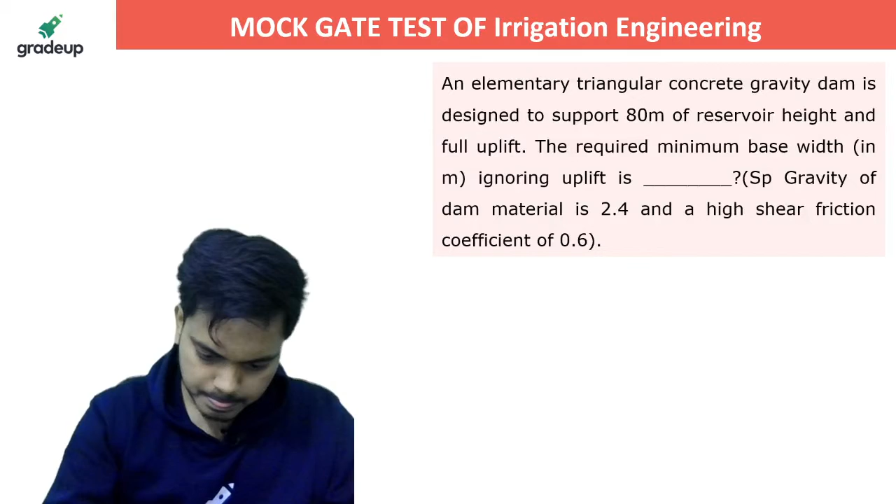And as per the sliding criteria, the value is this much. We have to choose the greater value of these two.

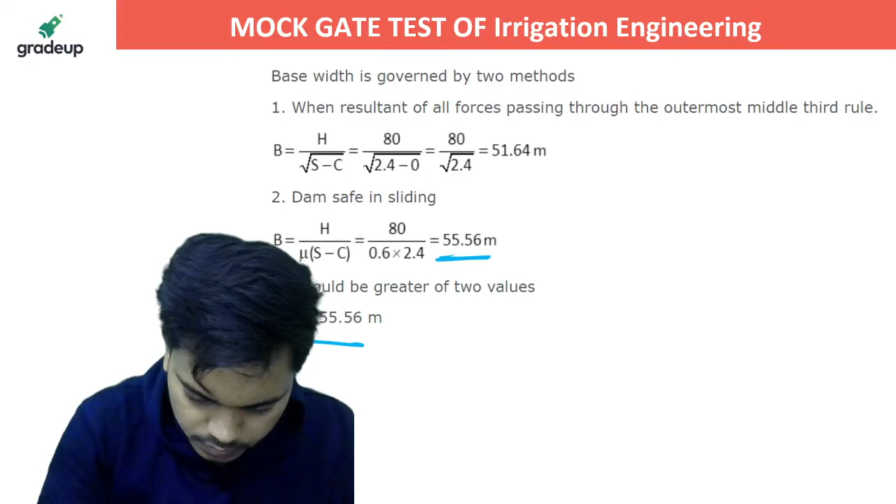Percentage you have to tell me. So if you are getting guys 75% or above, then you are in a very good position here. And if you are getting 60 to 75%, you have to again revise the subject one more time. If you are getting less than 60% in this test, then guys, you have to give it a special attention, and that's it.